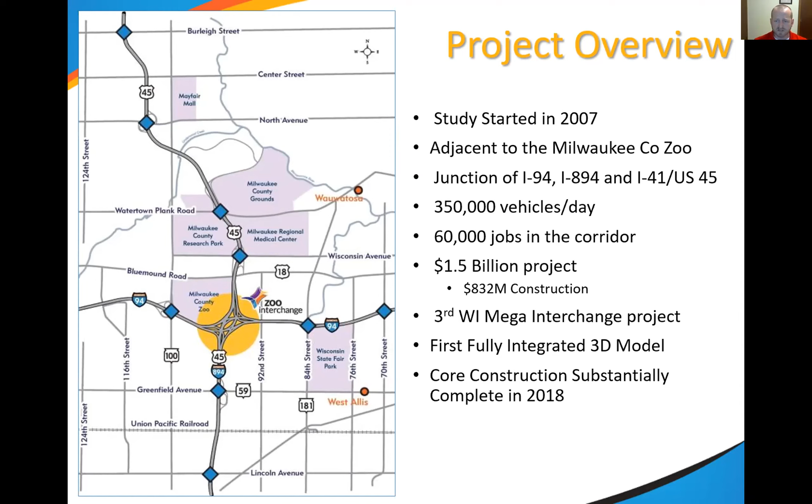We did complete the core of the interchange back in 2018, and all that's remaining is just the north leg of the zoo. There were some funding issues that pushed that leg of the zoo into the current time frame. So here's just a little bit of an overview of the overall project.

The various contracts and lettings that occurred over the last decade here. Like I stated, we started in 2013 and were substantially complete in 2018, with various contracts staged for efficiencies throughout the corridor. We also built some of the adjacent arterials so that we had those rehabbed and reconstructed for diversion of traffic during the construction of the actual core.

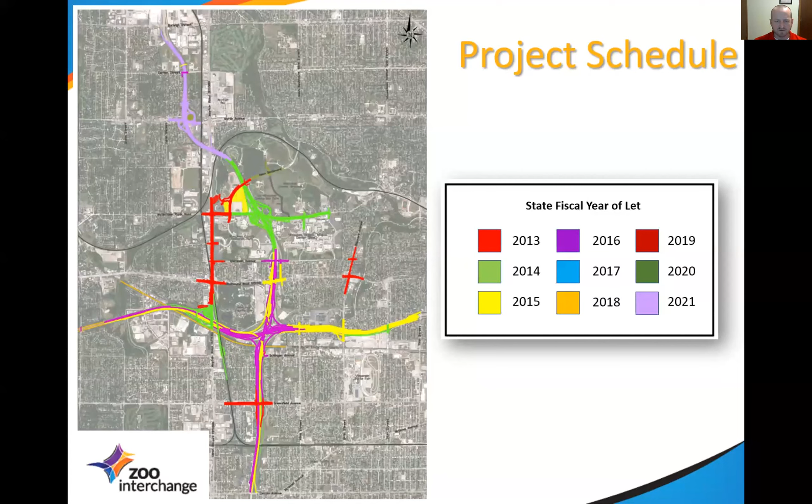We maintained 2 lanes of traffic throughout the project in the core and all the cardinal directions. We did have long-term ramp closures on system ramps during the project, but in the cardinal directions we maintained 2 lanes of traffic at all times, except for when we're doing night work.

Just some stats on the project: 50 PS&E deliverables, so a number of contracts, as I stated, to deliver this overall program. A number of real estate acquisitions, and kind of what we call a mega project within the mega project. We had over $100 million of compensable utilities, the majority of that being American transmission lines that had to be relocated throughout the corridor to allow for the construction.

So a big effort there to get utilities figured out for this project. And then two major impacts with the Union Pacific Railroad. We had a tunnel extension and a reconstruction of a bridge back in 2014.

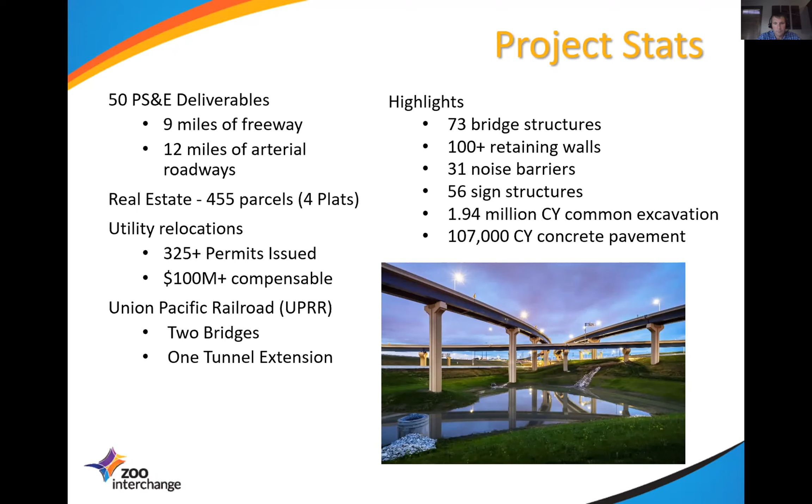And then we have a bridge that's being reconstructed as we speak that Sean's going to touch on a little bit. You can see some of the numbers there with the number of structures, retaining walls, noise barriers, sign structures, and the entire interchange is reinforced concrete pavement. You can see the numbers there on the cubic yards of concrete.

And then just a quick before and after picture for you. This is looking at the old interchange, a picture from 2008, kind of an old, outdated design. It was built in the 1960s, like a lot of our interstate system, and it had the left-hand exits with kind of that football in the middle there with the ramps.

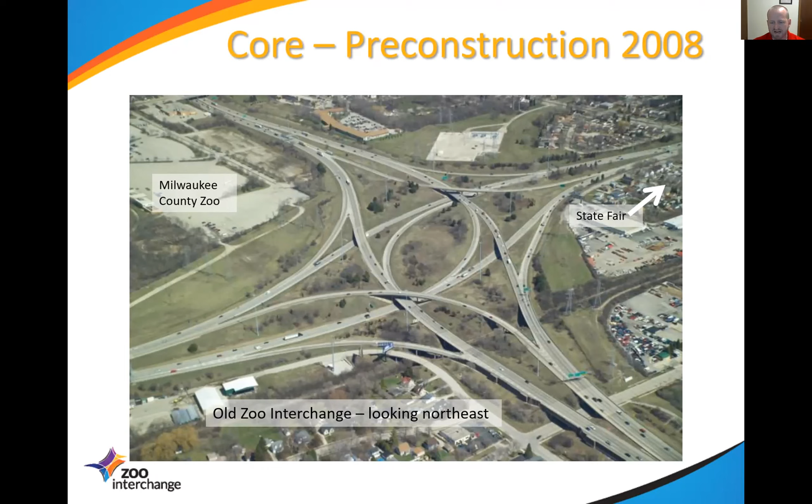And the new interchange was designed with full federal standards. Everything's right-hand exits, and now it's flyover ramps instead of this one which was a little bit more at grade. So here's a picture from 2018 of what the new interchange looks like, and you can see quite a drastic change to the landscape here in this area, and the complex staging that was required to build this while maintaining 2 lanes of traffic.

With that, I'm going to turn it over to Sean, and Sean's going to now walk through some of our geotechnical considerations for the project.

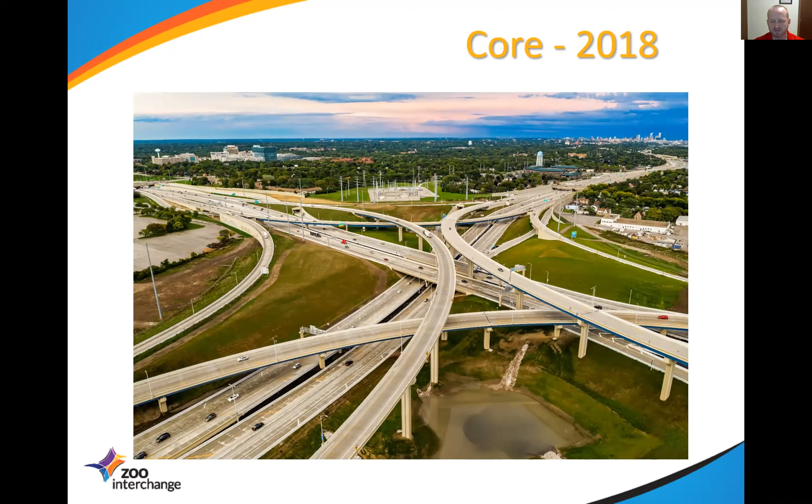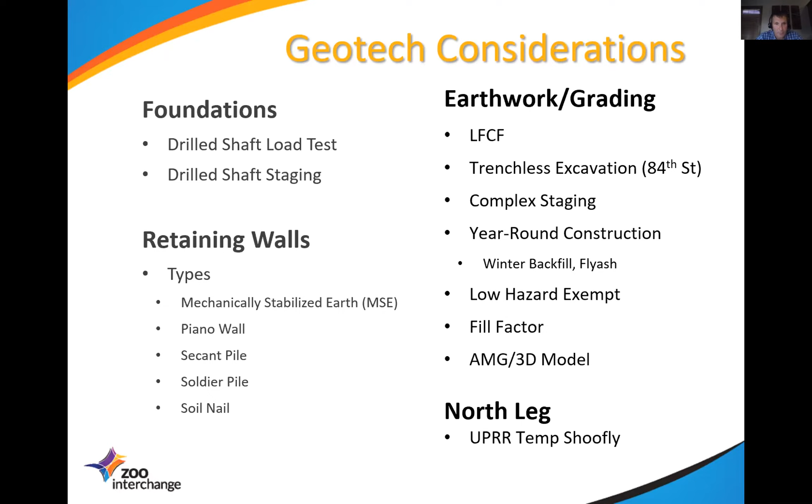Obviously, Jason went through it, and it was a massive project, but the goal with this presentation today is to talk about some geotech considerations and specifically some challenges we had that hopefully you guys all find interesting, and this kind of outlines everything I'm going to cover. We have limited time, so I can't spend too much time on each one, but I'll do my best, and then once we're done, hopefully we got a little bit of time for questions before the next presentation.

This picture right here is, on our end, we call it core 1, core 2. We had a whole bunch of lets for this project, but the 2 main projects that built the core of the interchange were core 1 and core 2. This picture is taken at the completion of core 1 before the start of core 2, so obviously you can see there's some new infrastructure, but there's also some existing.

And obviously the challenge with all these projects is to keep lanes open for traffic, so we had limited space available, and we knew we were going to have to use drilled shafts.

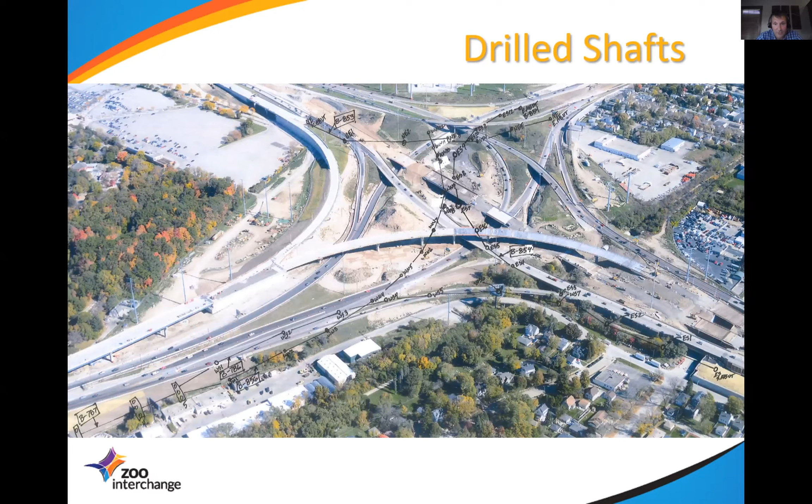Prior to construction, I think this was in 2010, 2011, we did a load test program. We actually went out and drilled some shafts in the core of the interchange. The primary purpose was we wanted to compare capacities and settlement of the shafts both with and without base grouting. Base grouting, basically, we inject high pressure grout at the base of the shaft to improve integrity.

We actually precast tubes in the shaft as the concrete's poured. So we ran this load test program, and the results definitely verified that the use of base grouting improved both capacities and substantially decreased settlement, so it definitely allowed us to optimize the design.

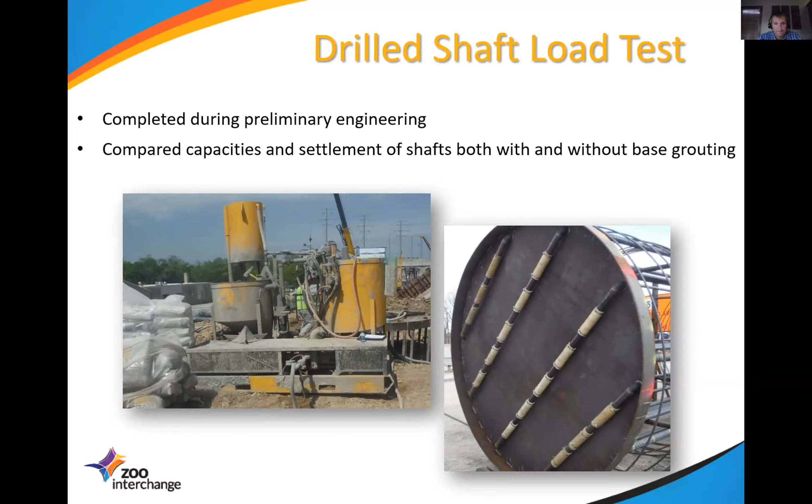So drilled shaft construction, we had some big shafts on this project, up to 10 foot in diameter. One of the tricks was to schedule the staging to allow construction, because even as a drilled shaft, the actual footprint of the shaft would be less than a big pile group to support some of these piers, but you still have to get the crane and everything in there.

So some of the staging on one of our bridges in particular, the east to south bridge, we called it, the shafts actually for some of the piers were drilled in May of 2016, but the bridge didn't open till winter, almost Thanksgiving of 2017. So those shafts were drilled well in advance of the bridge opening.

We staged traffic around it, and then they really just sat for over a year into the next construction season until the piers were poured. So that was one of the considerations.

Some lessons learned from previous mega programs: with these bigger shafts, you can see in the picture that steel rebar cage is huge, and the lifting and installation of that leaves a lot of room for error. So for every bridge, we developed a trial drilled shaft program that was written into the contract, requiring them to do a trial drilled shaft to prove their means and methods would work. It was actually very beneficial because we found that the contractor did have some issues, and they were able to correct them, avoiding problems once actual production shafts began.

Some other lessons learned from previous projects: we did segmental full depth casing for all the shafts, as well as the wet method, because in this area and some of the other megas we did around the area, we had water table concerns and granular layers, and we had intrusions into our concrete that we wanted to avoid. So the full depth casing with the wet method, plus CSL testing to verify integrity after shaft construction, allowed us to have a really good, superior product out there.

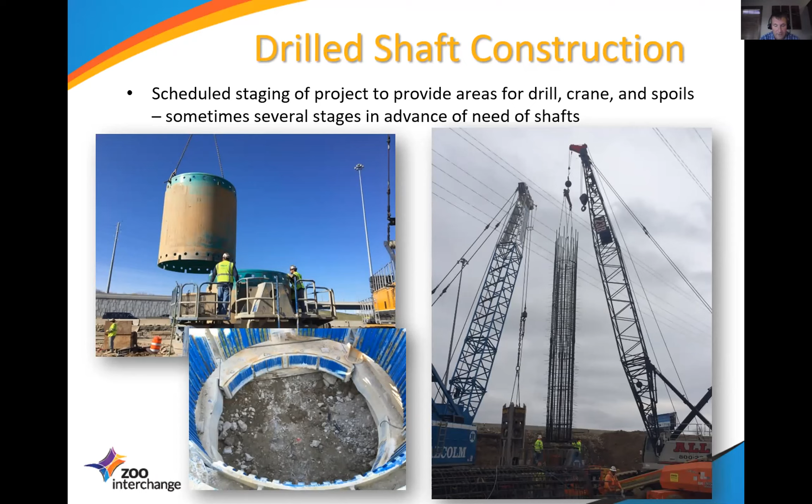Retaining walls. As Jason mentioned, with the enormity of this project, we had a lot of retaining walls, over 100 in the program. Our predominant retaining wall, based on conditions, would be a standard MSE wall with sand backfill. We had some areas with significant cut walls.

We would move on to soldier pile with tiebacks depending on the height of the wall. And then in some instances we also had secant pile walls, specifically if we had a wall needed at a bridge abutment where the retained height was so high it made sense to use a secant wall to support the abutment and retain the slope.

We had some other unique instances where, as Jason mentioned, there was $100 million of utility locates. We had large transmission lines through the project that could not be relocated until partway through the project. So we had some areas where it may have been an MSE wall or a soldier pile with tieback wall, but we actually went with a secant wall because we had to support the embankment holding up the existing tower before that could be removed.

We also had an instance with a hybrid wall that had to be considered in the design because the wall height got pretty high. It was a cut wall, and the majority of it was soldier pile with tiebacks, but there was an apartment complex with a swimming pool adjacent to the wall, with major concerns about deflection and any impacts to that pool. So we had a hybrid wall with soldier pile and lagging with tiebacks, and secants in between.

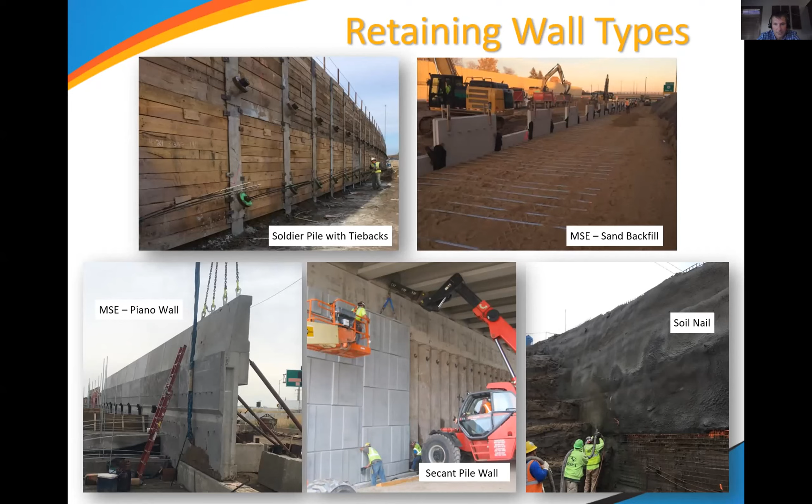Earthwork and grading. Going back to walls, we had an area in the southwest quadrant of the interchange where two of the flyover ramps landed, so it was a really intricate area. We had 4 retaining walls essentially built up upon each other, but doing initial borings, we found a compressible layer between 20 and 35 feet below ground surface.

During the geotechnical analysis process, they looked at whether standard construction using sand backfill with these walls would result in upwards of a foot or more of settlement. So during design, they looked at some other options.

One option would be to EBS this entire area, which the volume of earth to remove was massive, and then also the backfill. We settled on using lightweight foam concrete fill in lieu of the EBS to save a substantial amount of dollars. I think the estimate was approximately $10 million saved by not going with standard EBS.

One of the unique things with lightweight foam concrete fill is the entire mass is basically made up of just cement. If you envision it, it's essentially an 8 to 9 bag cement mix, but there's no aggregate or sand, and it's basically just foamed up. They call it foam, it's essentially dish soap type material. But that decreases the unit weight from standard sand, which would be 120 pounds per cubic foot. With this lightweight foam fill, we're at 30 to 35 pounds a cubic foot, so it's almost 25% of your standard sand weight, which is a substantial reduction.

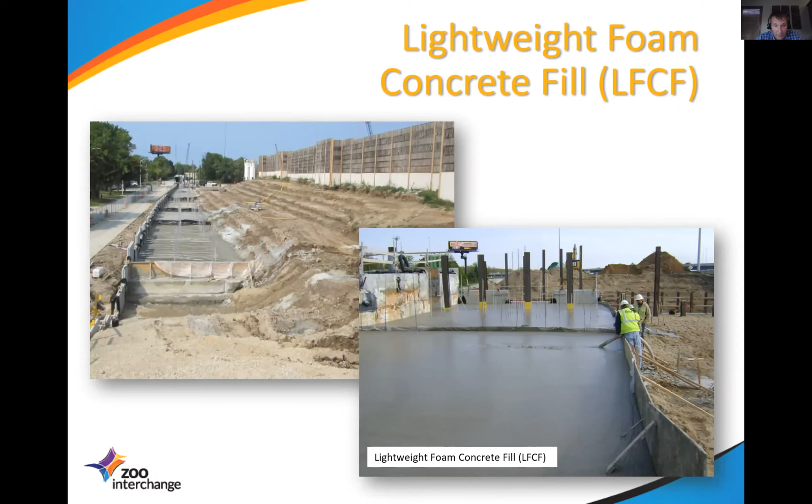One of the challenges we had is that the project went from 2013 to 2018, and we had some areas where we did open cut excavation instead of trenchless. At bigger depths, some of the influence area in the cuts that our spec would allow for spoil backfill—we did do spoil backfill, and found out later that we had future MSE walls that were over that foundation area.

So we did have to come back and do some EBS to correct that, just because we were unsure about the compaction and had to do some boring. That was one of the challenges when you have deeper cuts and projects spanning subsequent years. Sometimes you can do all the planning you can, but things will still be missed. That was definitely a challenge on a project of this complexity.

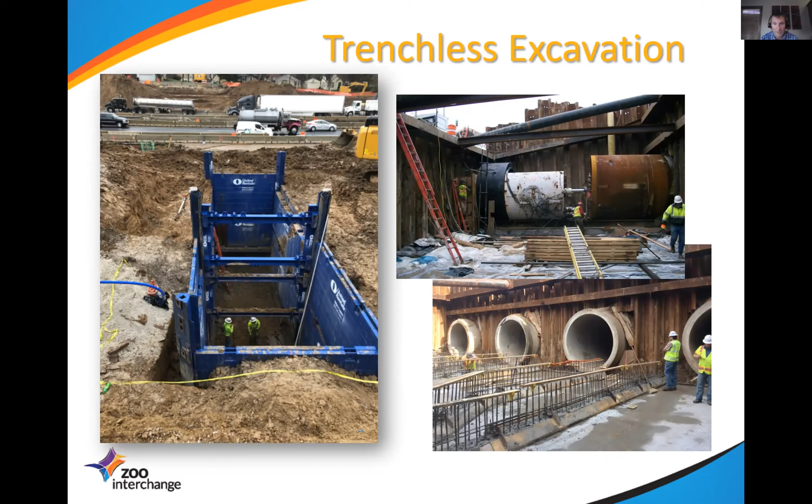We were able to maintain 5 lanes—3 lanes in one direction and 2 lanes in the other—with almost a 20-foot grade separation and over about 1,000 feet of new pavement. We did that with a very large temporary wire wall, which actually had geogrid reinforcement, contractor designed. That was successful, and it was actually in place for more than a year.

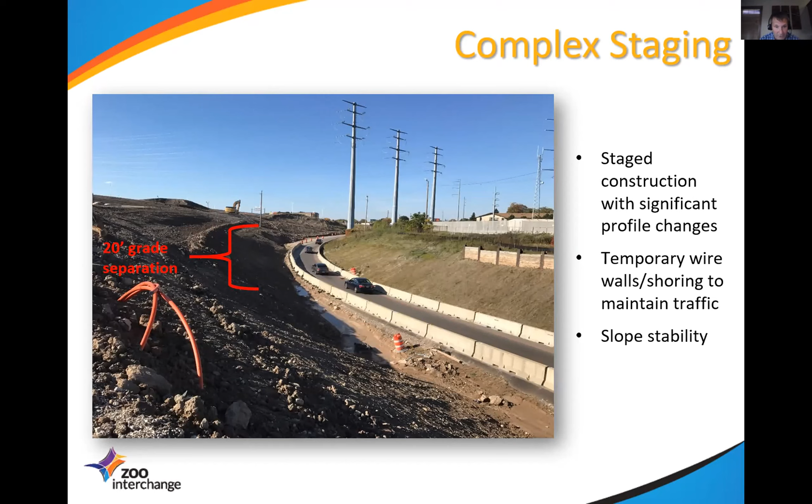For some of the slope stability issues, we wound up using a lot of spray-on soil stabilizer, or even covering areas that weren't topsoiled yet with EMAT and seed, trying to get grass to grow in clays just to make this work out. It was definitely a challenge throughout the project.

Year-round construction. Major work on the interchange started in 2013 and finished in 2018. That resulted in some bottlenecks in the schedule, where some projects had to be completed by a certain point in time, or interim portions of a project needed a tight time window so we could maintain traffic on the freeway and still get the project completed.

Obviously that's a terrible time period to be doing embankment work. And if anybody remembers, I'm sure Minnesota was just as bad, the winter of 2013 and 2014 we had the polar vortex, or so they want to call it. So we had major challenges keeping our QMP subgrade at adequate density and moisture levels.

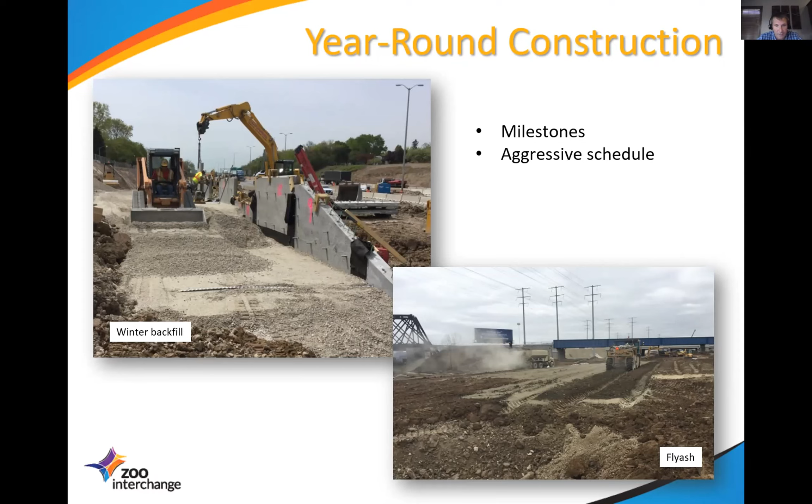Low hazard exempt soils, this is basically exempt solid waste soils that would typically, if you had nowhere else to go with it, have to go to a landfill. In this case, we were allowed, with coordination with the DNR, to keep these on site. We did a lot of pre-testing to identify the soils and worked with the Wisconsin Department of Natural Resources to allow reuse in the right of way.

The challenge we had was unknown conditions. We found out the biggest impact was that the original interchange was built in the early 60s, and all the piling were wood piling that were creosote treated. So after 60, 70 years, that creosote migrated into the adjacent soils and resulted in additional impacts at a lot of locations that we hadn't considered.

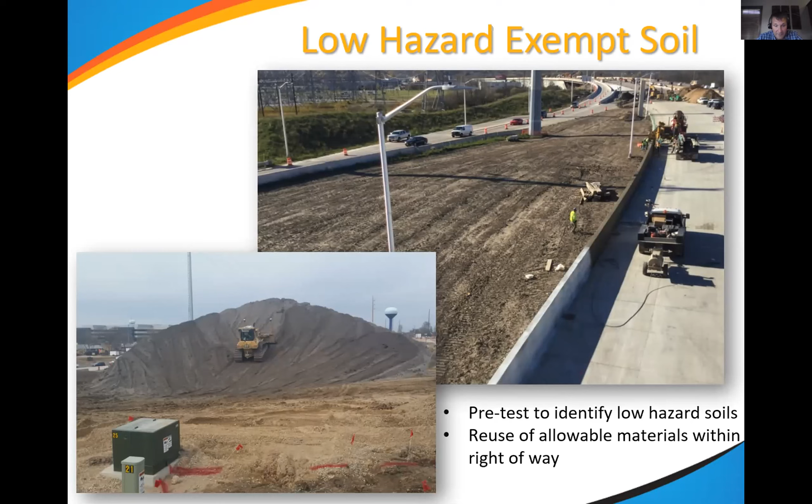There was a lot of work during construction with the DNR and the contractor to find additional fill areas and keep this material on site, because to landfill it you're talking $50 to $80 a cubic yard, versus keeping it on site at $15 a cubic yard. So there are major cost impacts there.

Fill factor - I'll try to hit on this pretty quick. This gets confusing. A lot of people think fill factor, expansion factor, is how the material expands in the vehicle. In Wisconsin, when we're doing our earthwork balance, we expand the fills.

We take the known fill volume, the cut volume, and we expand the fill. We'd expand the known fill volume by a certain degree, assuming that the in situ soils, when you compact them to 95%, whatever type of product you're using, would actually shrink. We found out through testing, and this picture shows some deeper cuts, that in fact it's more of a 1-to-1 ratio than what we had planned, an estimated factor of 1.2.

In past projects, we were wondering why there's always this extra dirt. Just a quick example, we had a project with 1 million yards of cut with 830,000 yards of fill using that 1.2 factor. We were thinking it was balanced, but in reality, using the 1-to-1 ratio, you got an additional 170,000 yards or so of waste that you didn't account for.

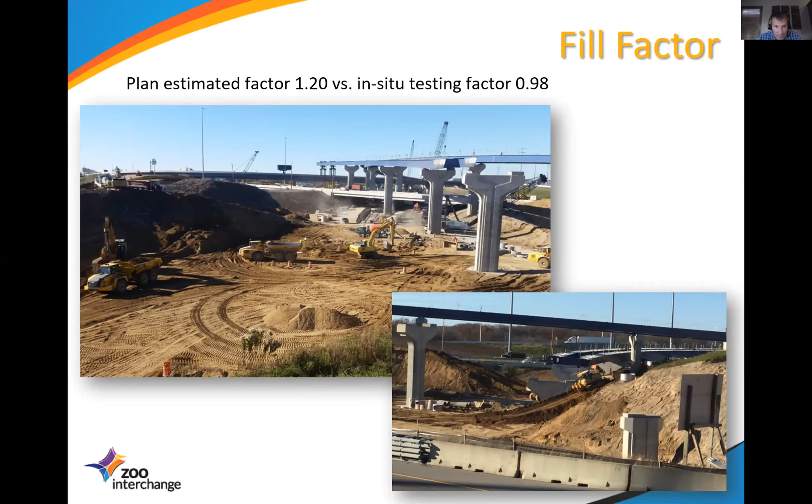Utilization of 3D modeling - Jason kind of hit on this too - was used a lot during design, but we carried this into construction. We had a full-time CAD tech on staff for construction delivery that allowed us to resolve a bunch of issues.

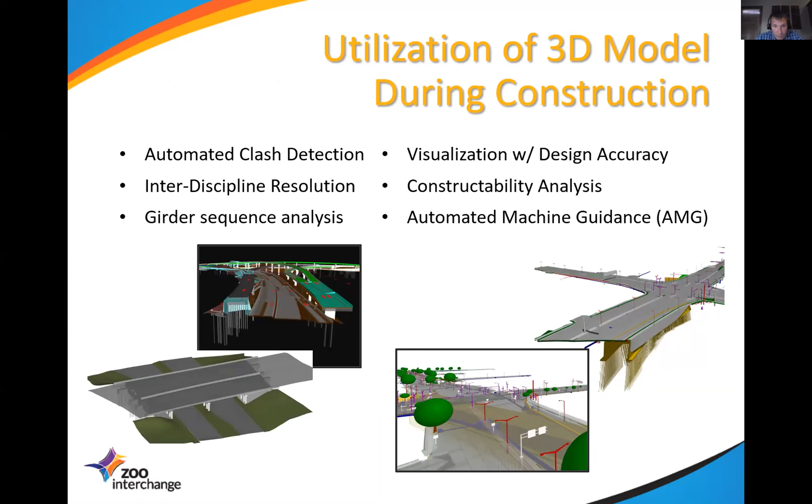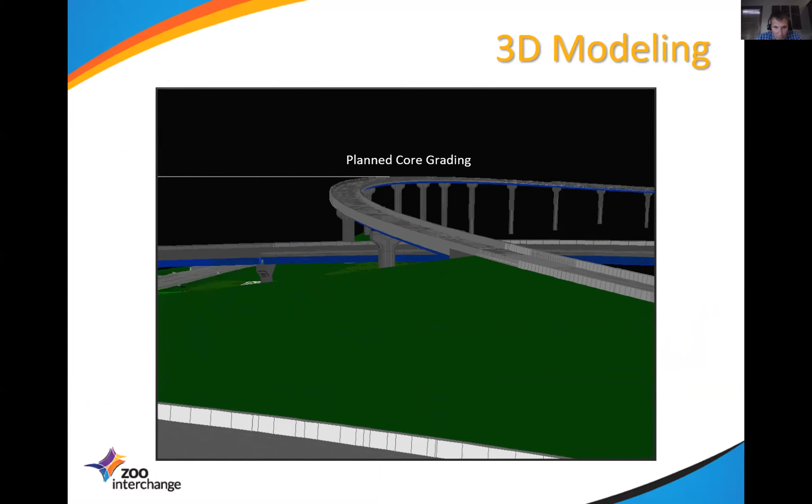Real quick, this is planned core grading. You can kind of see that green area in the middle with the slope. This is utilizing 3D modeling from the plan section.

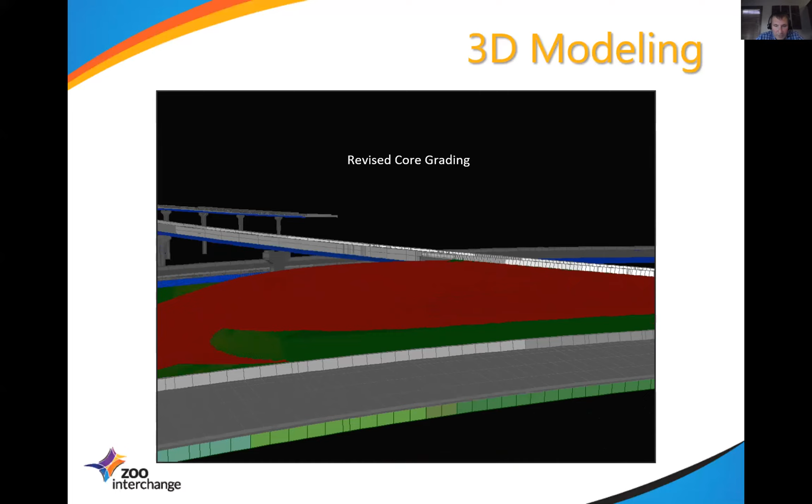Now if we go to the revised core grading, this red area - basically what we did is we eliminated some plan cuts there and we added some fills. We utilized the model to confirm that the aesthetics were good with it. We analyzed the stormwater impacts, we were fine, but what this let us do was mutually beneficial and improved the aesthetics. It helped the contractor get rid of some excess waste related to the fill factor.

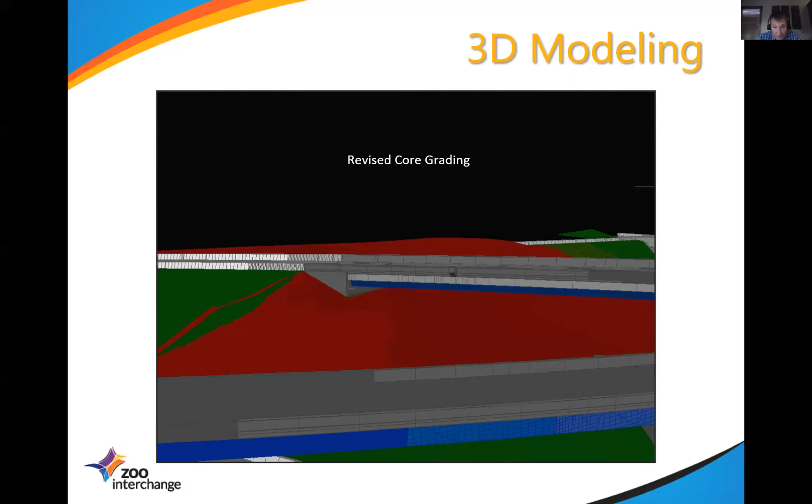There was an old northbound abutment related in there that the plans would have had us cut material out, and we would have gotten into that material around the old timber piles. So we were able to just leave those in place. This was definitely a win-win for both us and the contractor.

Lastly, North Lake - that's the project that's happening right now that I'm the project manager on. A lot of aspects up there that we're dealing with, and all the soils are silt, and we could talk about that for a long time. But one of our biggest challenges, we have a railroad structure.

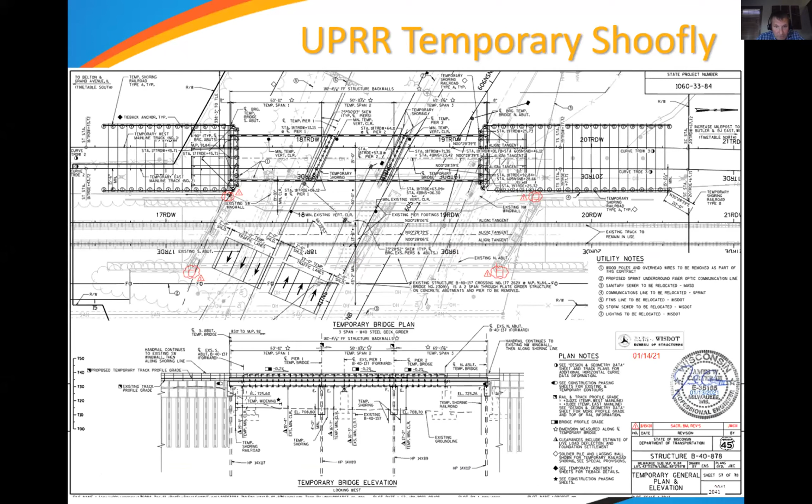We're calling this the temp shoofly. Because we're not on a curve, we're not able to just build a new bridge. We actually have to build a temporary bridge, put train traffic on it, and then build the permanent bridge and put trains back on the permanent structure. So that's why this project is 3 years instead of 2.

One of the interesting or challenging aspects of the shoofly structure is the timber lagging supports around the 2 abutments that you can see. The lagging - the picture doesn't do it justice. It's massive what the railroad requires.

One of the challenging parts is it's so close to the existing tracks that we're not able to dig into the existing embankment. So the lagging piles are installed, the lagging drops down to touch existing grade, but then next year, when we build the new structure and the wraparound secant walls, we're going to have to excavate down another 6 to 8 feet. We're actually going to have to do that and install lagging while train traffic is on the structure above the area being supported. We haven't gotten there yet, but that's definitely a unique thing that's going to be challenging.

The reason they had to do it that way is the approval process with the railroad. If we had to install shoring, it would be in the type A influence zone, and the shoring would have required tiebacks, and it was unsure that the railroad would allow us to leave those in place. So we had to go this route.

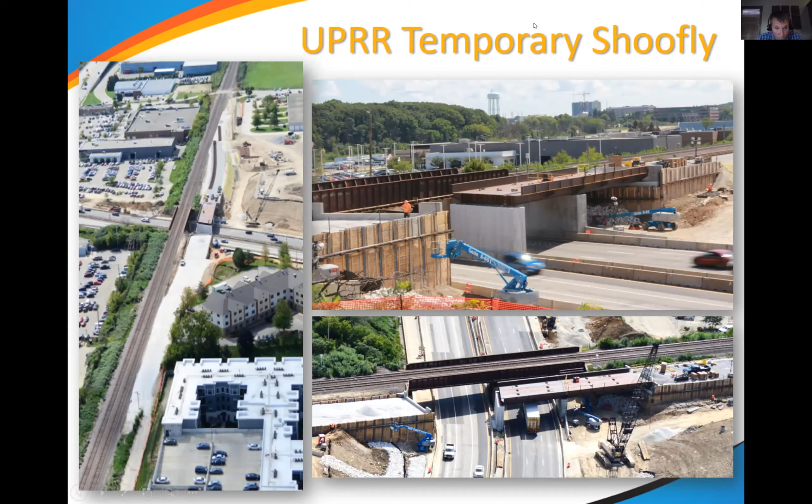Obviously it's so narrow because you can see there's a big hotel very close to the tracks that makes this shoofly have to stay so close. So we actually had to build a retaining wall to support a retaining wall there as well. A lot of challenges with this project, and we're hoping for a successful outcome.